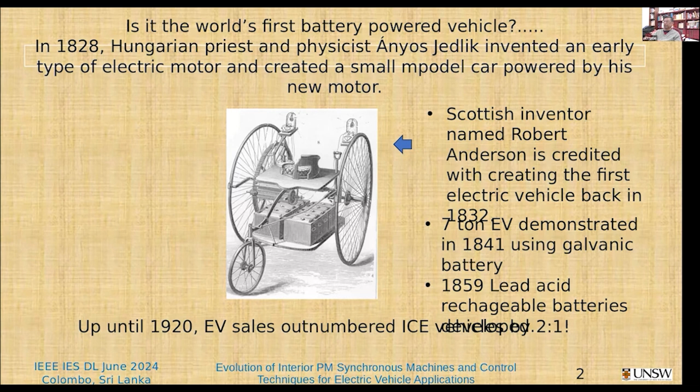The next page, please. Yeah. So, yeah. Because I don't have full control on the screen.

Okay, so what do we need to have a successful and viable electric vehicle? You need an electric motor of high power density, which is item number 1. And the motor must have a very high field weakening range. I'll talk about what is meant by field weakening range a bit later on. And then the motor must have very fast integrated sensors and controllers.

And then the converter has to be very fast and high bandwidth, which is usually obtained with high frequency integrated converters that are now available in the form of IGBT and MOSFET inverters and so on. And then high energy and high power density batteries.

As you may be well aware, the high power density and high energy density batteries are still undergoing much development. I cannot say that it has seen the full development yet, but every day you find in the news that the solid-state batteries are coming, the range is coming up, and so on. So the battery chemistry and other properties of the battery, like energy density, power density, battery range, battery life, total energy storage, and so on, are getting better virtually every day.

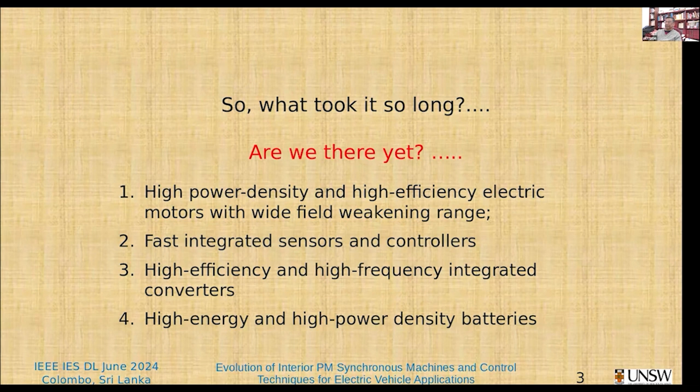Can I go to the next page now?

So can you go to the next page, please?

Now, in order for the world to go to fully electric vehicles, which some companies are saying they will convert all their vehicle manufacturing into electric vehicle making by 2030 or 2035 or 2040 and so on. Most manufacturers are committing to a not too distant future where all vehicles will become electric vehicles, and that will need about 300 terawatt hours of annual battery production, which we are nowhere near, but the way things are going, we should arrive there in the not too distant future.

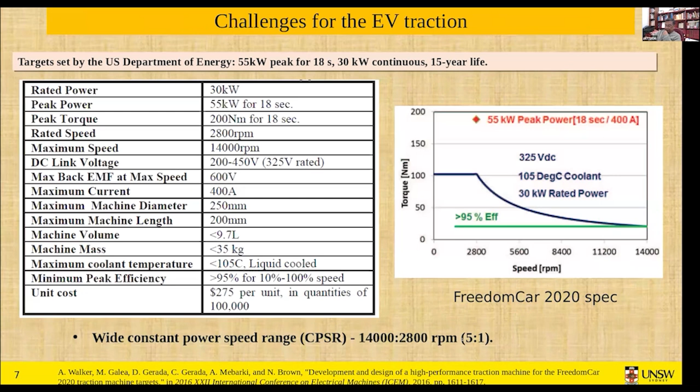Next slide, please. Professor, can you try moving the slides from your side? I have given the control to you. Can you just try it? No, it doesn't move. Doesn't move, right? Right. It works. Okay, so this is the torque versus, oh, sorry, I'm too far ahead. I'm now showing the slide. Sorry, next one. I'm not sure which slide number this is. 8. We can see 8.

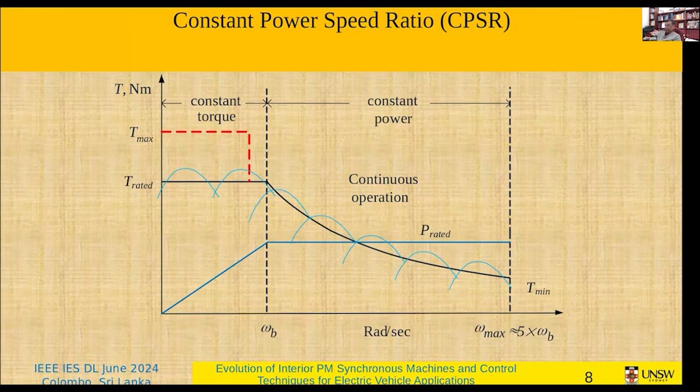I'm now trying to go to the next slide. I have pressed the button for that. Nothing seems to be happening. Yeah, maybe I'll do that. Okay.

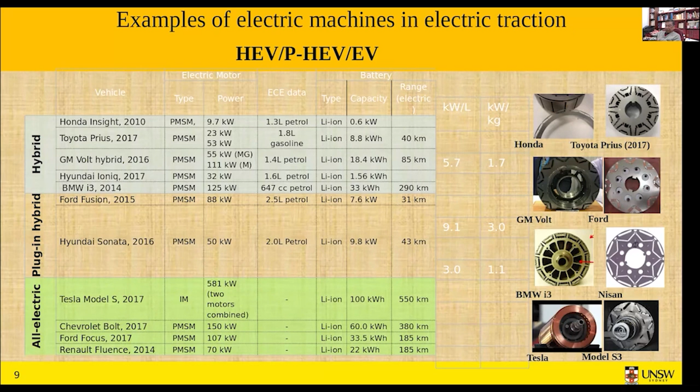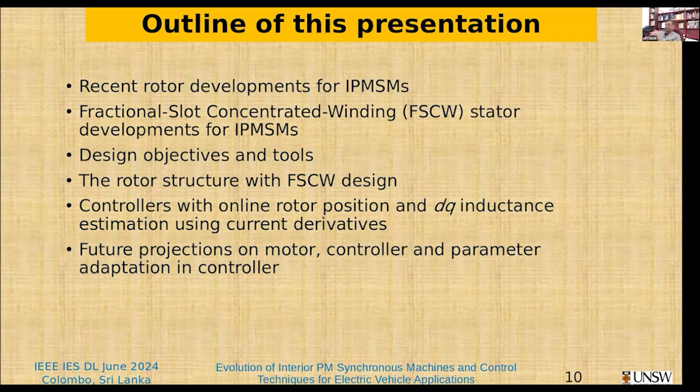So next slide, please. Next one. So this is part one, the recent developments in electric motor.

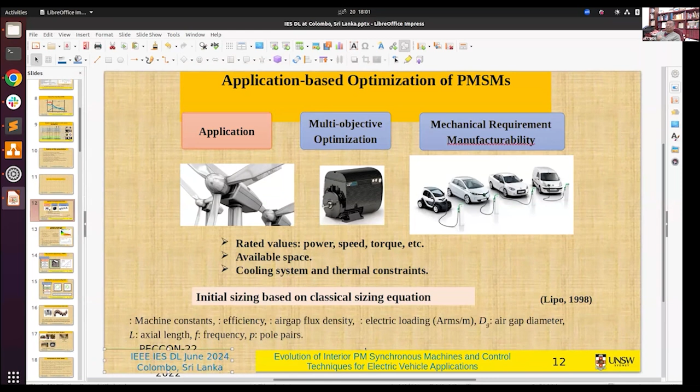I'm not seeing the whole screen. I think something below I'm not being able to see. I don't know why. Can you reduce, no, sorry. That page that you were showing, there was a sizing equation here. Why am I not being able to see that? Oh. There was an equation here. I don't know why.

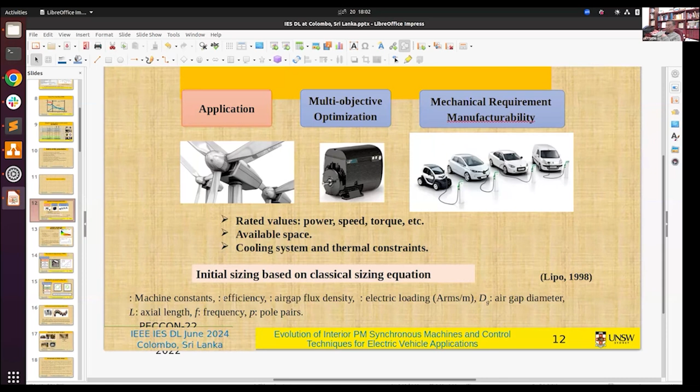Okay, so the machine has to have high efficiency, high air gap flux density, and low diameter, the minimum diameter and minimum length, so that it can be housed within the electric vehicle and so on. So the density of the machine in terms of power to volume ratio has to be very high.

And that equation that I don't see now, why is it missing? I don't know. So that equation showed what parameters we normally have on the mechanical side in terms of dimensioning the machine, and then later what parameters we have in terms of the electromagnetic part of the machine.

So can I go to the next slide now? I think for some reason, the presentation is going outside the screen, at least on my screen. So I don't know why. You can now go to the previous slide, please. Okay, so

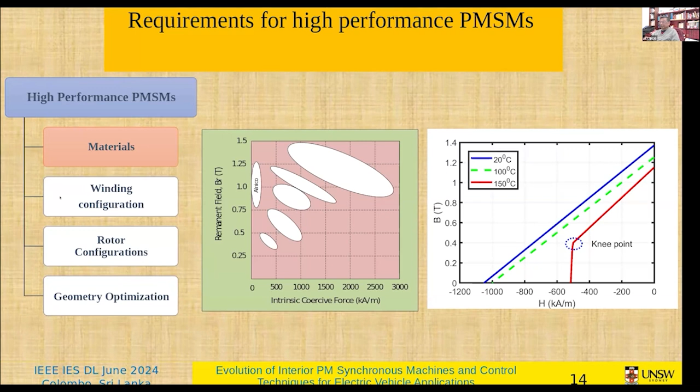Okay, and then let's go to the next slide, please. Oh. Then we look for, sorry, next slide, not so much so far. Yeah, just the next one here.

Up to about 15, 20 years ago, most electrical machines had distributed winding, where the A, B, and C phase windings were distributed all around the stator slots. I think most of you would be familiar if you're an electrical engineer. The distribution of the winding is all around the cylindrical structure of the stator. But recently, we have what we call concentrated winding or fractional slot concentrated winding, which is defined by slots per pole per phase, which is called SPP.

If you divide the number of slots by the number of poles, normally 4-pole machines or 12-pole machines or 18-pole machines, so we know the number of poles in order to determine the base speed. And then we have the phase, usually 3 phase. You can see from the diagram on the right that A, B, and C windings are in localized slots. A winding is in the left and right slots, B winding is on the top and bottom slots, and so on. So the slots don't overlap, which are called concentrated windings.

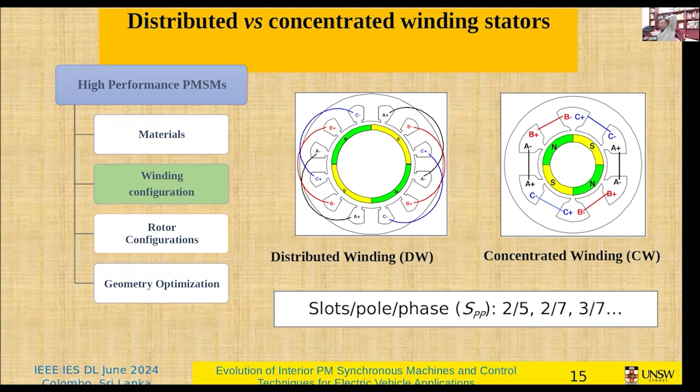Now, these are the slots, and the windings are concentrated, as you can see in this diagram. The slots and the windings can be modular. That means each pole can come with its winding. This is not how the distributed windings are made. This is called fractional slot concentrated winding design. In this design, the stator poles and the windings can be wound separately and then stacked together.

Now, this has several advantages. One is that we can do modular design. The pole and the winding can be manufactured separately, and then they can be put together as shown on the right-hand side. This kind of concentrated winding also gives you high inductance in the stator windings, which means that the inverter, the motor drive, has a high fault current rating, or the fault current can be tolerated better because of the high inductance. The inductance will slow down the rise of current

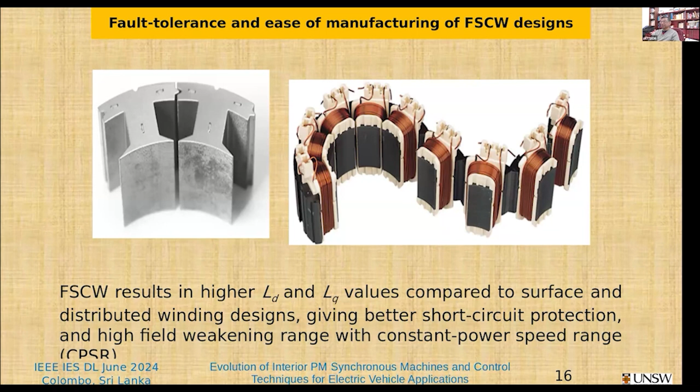Now, as you can see here, the example at the top left hand has several motors, IPM machine with concentrated winding. As you can see, the windings are put together on individual poles, and then they are assembled together. All right. So, in other words, the stator parts come in parts, in many parts, and they're simply put together.

Now, in one of those slides at the bottom, which is the right-hand side, we have the magnet. You can see here the magnets are in the rotor, and the stator is on the left-hand side of the Toyota Prius, which is 2010 and 2017 design. So you can see that the magnets look like a V. I'll talk about that a bit more later on.

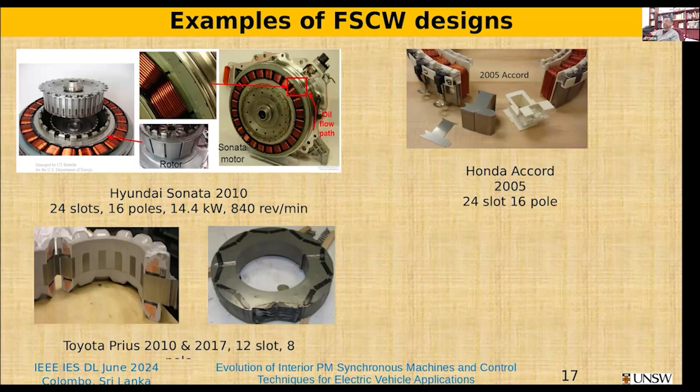So this is the way IPM machines are being designed. The magnets in the rotor, and the magnets have certain shape, in this case V shape. And if you look closely, you will also see that there is a bit of iron between the two parts of the V, and that iron has to be very carefully dimensioned so that the machine has the proper field weakening capability. So next slide, please.

Now, I have already mentioned some of this before. The FSCW design, the fractional slot design, can give you high field weakening range. Cogging torque can be made very small by using a very large LCM, the least common multiple between the number of poles and the number of slots. It's all in that number called SPP, which is slots per pole per phase.

Now, the concentrated winding doesn't have the end winding. In distributed windings, the winding at the back of the cylindrical body has to travel rotationally, has to travel in an angular direction before entering the next slot. So that is an overhanging part of the winding, which serves no purpose. In terms of torque production, that means the copper length is reduced, the length of the winding is reduced, and as a result, copper losses are also reduced in this machine so that the efficiency can be higher.

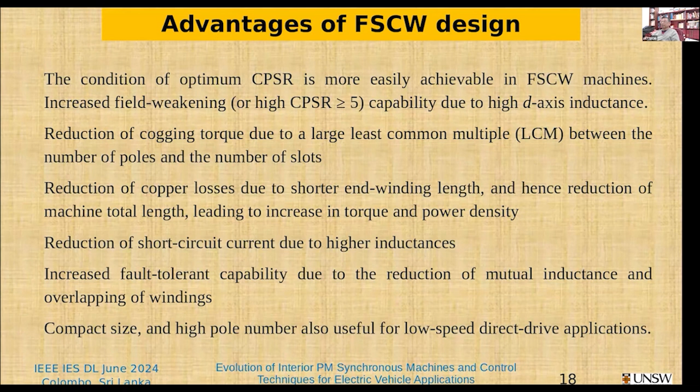And because of absence of the overhanging winding of the distributed winding, the motor becomes of compact size, and that also gives you high power density, which is required for electric vehicle because the space under the vehicle is very limited and therefore expensive, and has to be used with a lot of efficiency. So next slide, please.

Now, after the stator design comes the rotor design. I have mentioned V-shaped winding, spoke-shaped winding, and then multi-layer winding. There are several multi-layer types, can be V-shaped, and then combination of V and spoke, and so on. There are many geometries possible, all right? But in the last few years, all these geometries have been studied extensively using finite element method of analysis, and then various designs of the rotor poles have been optimized.

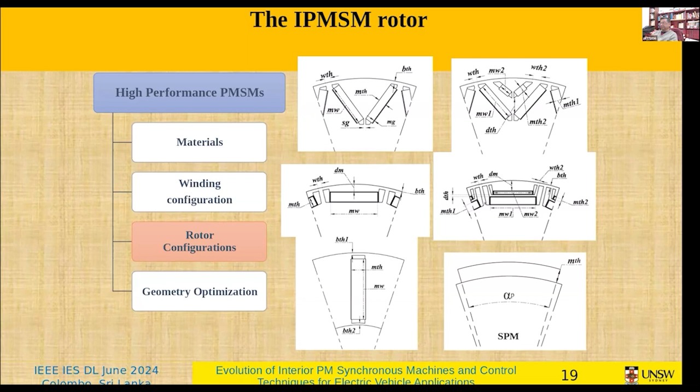Now, the geometry optimization. The geometry that you had seen in the previous slide, both in terms of the stator and the rotor, the placement of the magnets, the thickness of the magnets, the bridge between the two sets of magnets, which is the middle part of the two sets of magnets. So various dimensions are there: length and separation at the outer part, at the top of the magnet, separation at the bottom of the magnet, separation between the magnets, the iron bridge dimensions, and similarly for the stator, teeth and slot and so on. There are so many dimensions. So we need to have the geometry optimized, which is the last part, okay?

And in the geometry optimization, we first decide what attributes of the machine we want to have, all right? What inductance we require, which will give us sufficient fault tolerance. What should be the efficiency of the machine? What should be the low torque ripple? What should be the power factor? What should be the torque density or power density, and so on? And what should be the field weakening range, whether we are meeting the 5 times or 4 times or 6 times the power range from base speed to full speed. So all kinds of attributes or optimization goals we can define, all right?

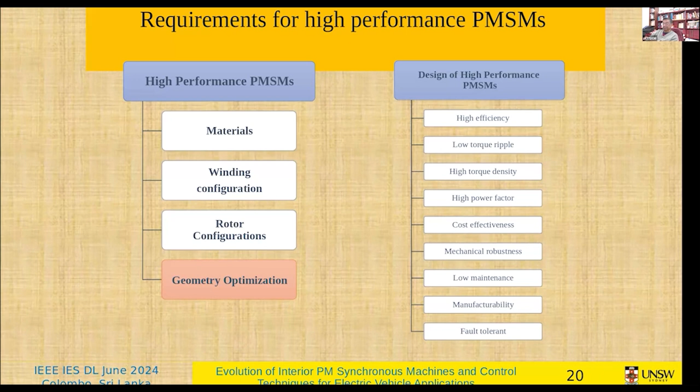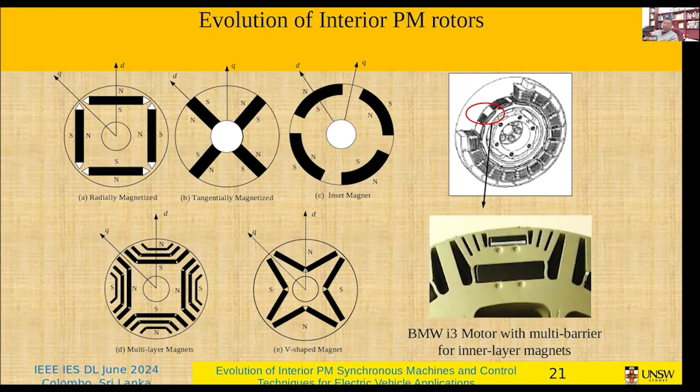Can I go to the next slide, please? So these are some typical machine designs. As I said, the V-shaped and the multi-layered designs, which are items D and E, are the two most favored. The multi-layered design is favored in Europe, and the rest of the world is using V-shaped magnets. Next slide, please.

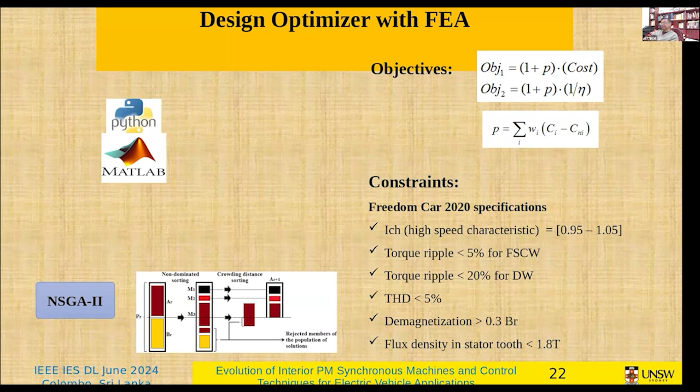Now, the optimization process, for example, the Freedom Car 2020 specification defines these specifications, all right, that a motor must meet. And then we used MATLAB, then finite element analysis and optimization procedures for every dimension change to see if these characteristics can be met. So these were goals set for Freedom Car in the USA, Freedom Car 2020. All right. But one motor that we designed, came up with in 2018 and 19, meets these characteristics, except for the power density. All right, we are slightly below the power density. And I'll show you that design further.

So can I go to the next stage? Next page. Next page, please. This one? Yeah. So,

This is the thermal design. Depending on the magnet and the iron dimensions, we can create a thermal model, all right, in terms of thermal resistance, thermal capacitance, and so on. So that is an RL network or RC network, which we can establish for the thermal model of the machine. And then we solve the thermal model to see what will be the power loss. All right. And then we determine from the thermal mass what will be the temperature range or rise. And if the temperature rise will go outside the magnet temperature limit. All right. Normally the magnet temperature is to be kept within 100 degrees C. So not only do we need the other electromagnetic performance, we also have to have a thermal performance.

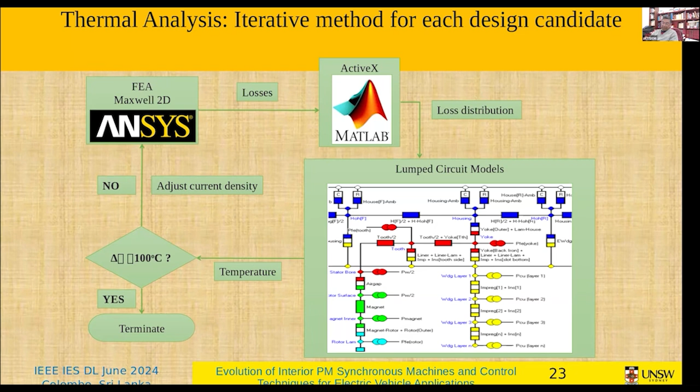So these are one design reported in this paper, which is called delta-shaped magnets, all right, which is a rotor which was optimized, and their goals was to extend the field weakening range or constant power range, minimize losses, reduce torque pulsations, reduce harmonics in back EMF so that the torque ripple is contained, and so on.

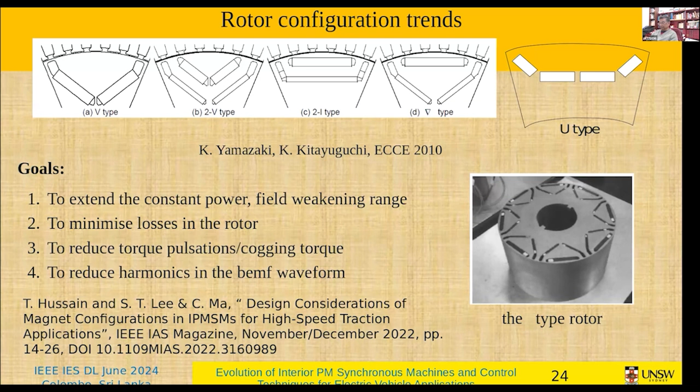So the delta-shaped magnets look very promising in 2010. However, I have not seen any use of it in any industrially produced electric vehicle yet. All right. I'm just bringing up this design to show that there are so many varieties of electromagnetic design that have been used or tried with a view to improve and meet the performance requirement of electric vehicles. Next slide, please.

Now, this is the Toyota hybrid vehicle. This is the Toyota vehicle Prius motor characteristics, which is used for hybrid vehicles. All right, it doesn't have the full 5-to-1 speed field weakening range because it is only used for duty to accelerate from 0 to full speed. All right, not for field weakening.

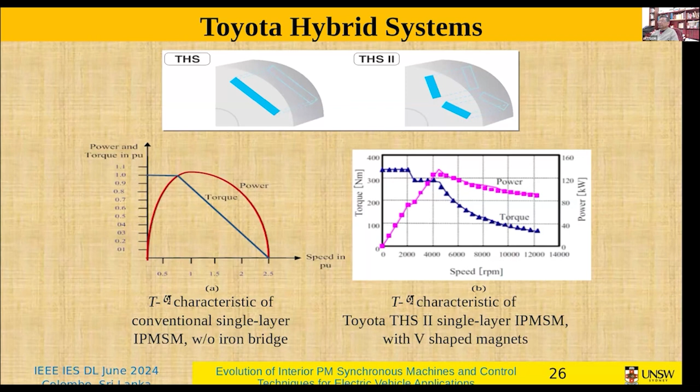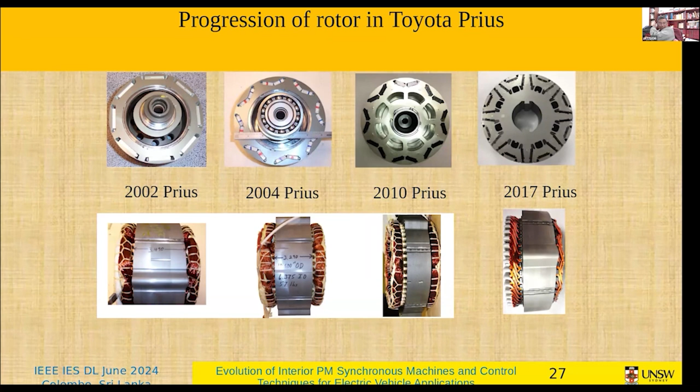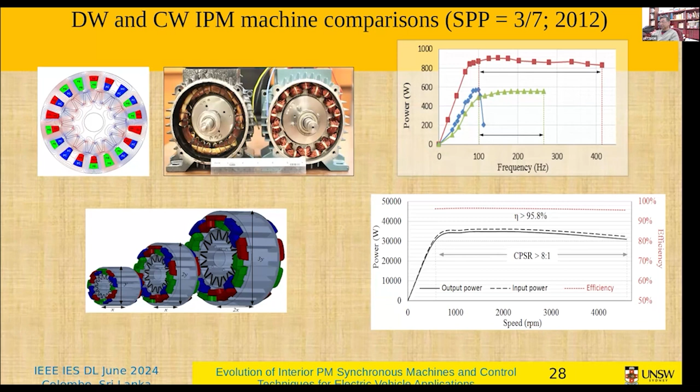an 18 slot, 14 pole machine, there were low order harmonics of torque which needed the D and Q axis shift when the machine was operated at high speed. That is not attractive at all for control purposes. That makes the control very complicated. Anyway, later on, after we understood the role of the V-shaped magnets, we then embarked on other designs. I'll show, if you go to the next slide, please.

Okay. So this Y-shaped motor allowed us to meet the FreedomCAR 2020 specification in 2018, except for the power density. And we believe that the power density could not be met because our machine was a small size machine, only 2 kilowatt. If we made it to higher capacity, then its power density would have been higher. So anyway, if you go to the next slide, please.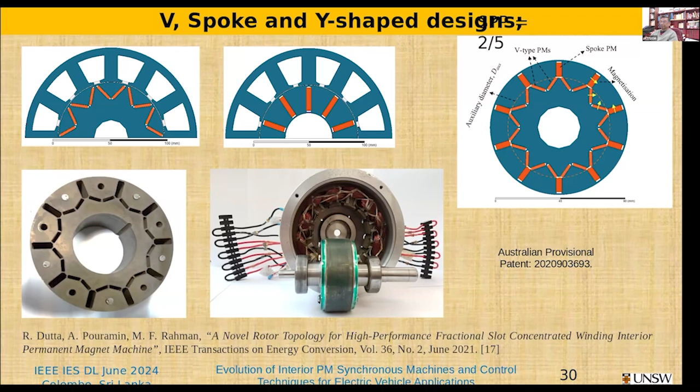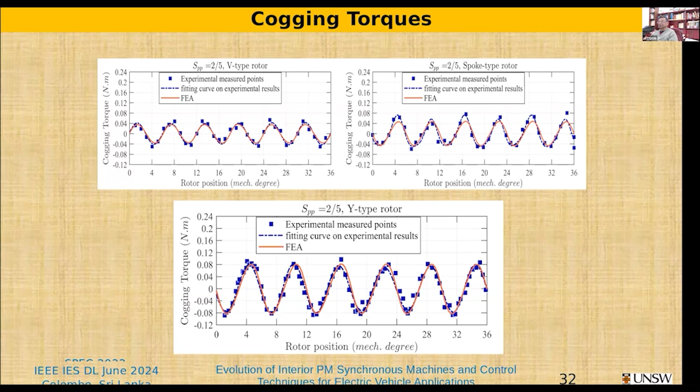These are torque ripples. Again, the Y-type rotor, while it is running, because of its high back EMF, and the slightly higher ripple, gives you about the same, slightly higher ripple torque. That means the torque produced varies at different angles. The motor produces different torque at different positions. Ideally, it should be very smooth, but that never happens in any electrical motor. And these torque pulsations are quite low compared to what many existing motors have.

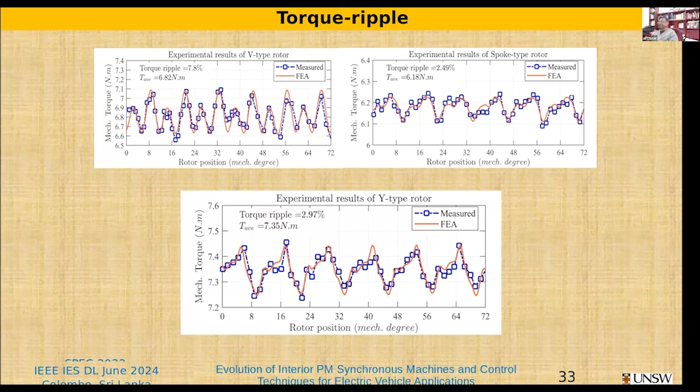Okay, so you can see that the V-shaped magnet has 7.8% cogging torque, whereas the Y-shaped motor has 2.97% ripple torque. Sorry, not cogging torque, but ripple torque. Next slide, please.

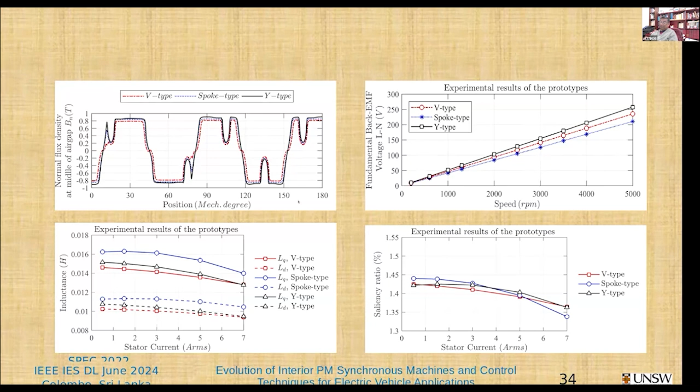These are inductances of the machine and the flux density distribution in the air gap and so on, which have been shown in another form in the previous slide. And we also see that the back EMF goes up linearly with speed, which is obvious, but the Y-shaped motor gives us higher back EMF compared to spoke type or V-shaped magnet motor, which is the reason for its higher torque production or torque density and lower ripple in terms of percentage. Okay, next slide, please.

So this is the top one. Again, the Y-shaped magnet shows higher torque speed range, all right, with the required 5-to-1 field weakening range and higher torque overall speed and so on. Okay, so compared with the two other types of motor, the Y-shaped motor has given the best characteristics, and we have produced the efficiency map of the motor. That means what will be the efficiency of the machine at different operating speeds and different operating torque. All right, so that is shown for the three different motors

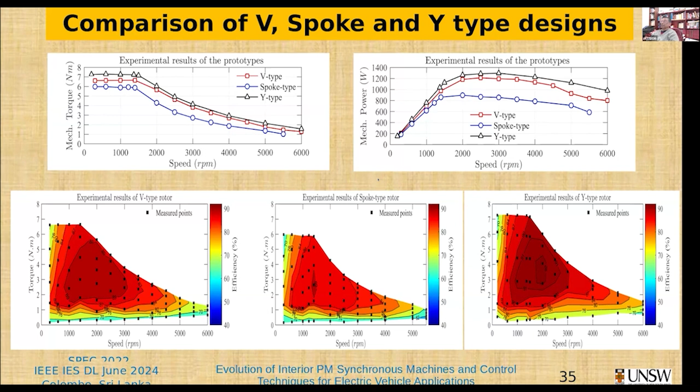in the three curves. And as you can see, if you overlap these three curves, it will become a very complex figure, but you can then determine that the Y-shaped motor gives you better efficiency, higher torque, and so on compared to the other two. So we have this Y-type motor currently patented in Australia and USA. And we are hoping that it will be taken up by some vehicle manufacturer sometime in the future. So next slide, please.

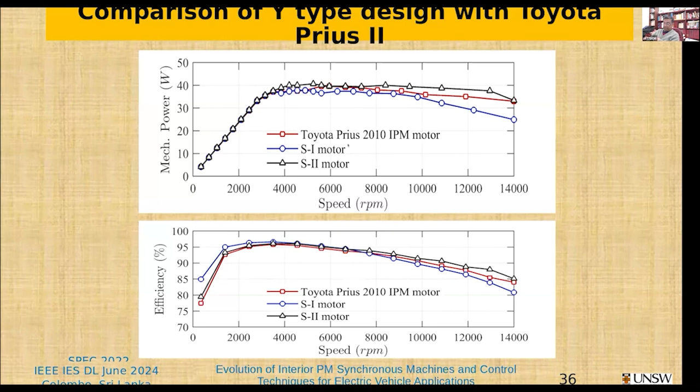This is a comparison between the Toyota motor and our Y-shape for similar power range, or for similar dimensions of the Toyota Prius, okay? And we can see that our motor is a little bit better than the Toyota motor. Now, let's go to the next slide, please.

So this is the summary of the IPM motor development. The designs are targeted to meet specific specifications. The designs can now be thoroughly checked by using multi-objective optimization process, advanced optimization techniques that I have just mentioned in this presentation can lead to novel designs. Our Y-shape motor is, we consider, such a novel design. All right. So because various companies are coming up with various types of design, off-the-shelf IPM machines, like you buy an induction motor for an application from the shelf, are still not available.

Off-the-shelf machine will probably take still a few years to settle down. That means everybody will agree that a certain design is the best and everybody will use that design, and there will be no other requirement to check any other design. Okay, so that stage hasn't arrived yet. It will probably arrive in a few years' time. So that's the summary of the motor development.

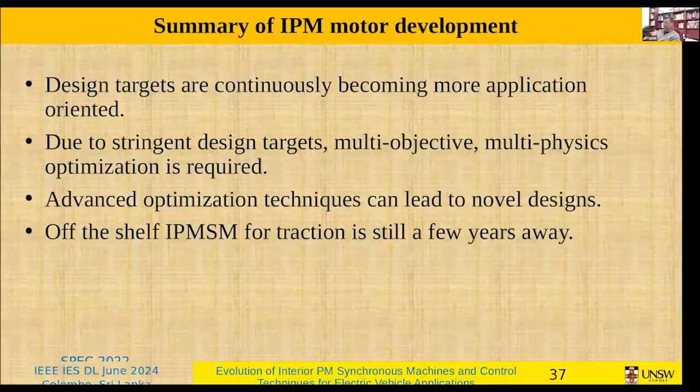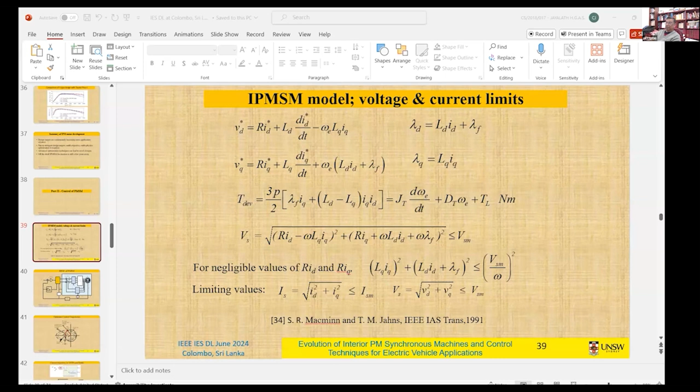So there will be no problem with equation presentation. I didn't realize that the PowerPoint presentation at your end may also require the equation. Yeah. How about this one, right? Professor, can you see it clearly now? It's much better, I guess. Yeah.

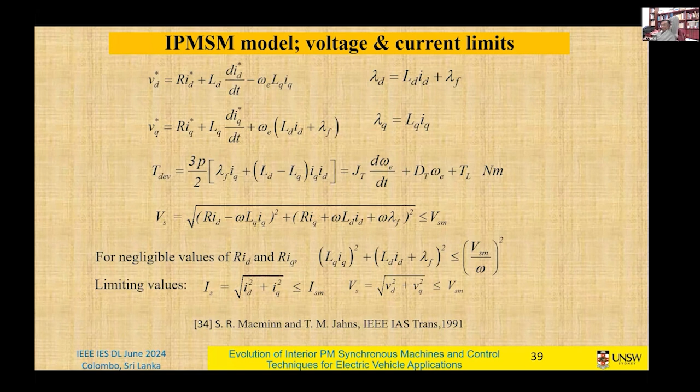Next slide. Next slide. Next one.

So when the machine is running at speed below base speed, our current will always be less than ISM. That means we are operating within the circle. Back EMF is below base speed. So our current reference ID can be simply calculated from this equation.

Now, this equation is simply the equation which is derived from there. Now, ID is given by this. And IQ is given by this expression, but this expression is found from a condition that torque will be maximum. So under base speed, the condition for maximum torque is like this. This is after a bit of mathematical analysis, which I have not included for the sake of time.

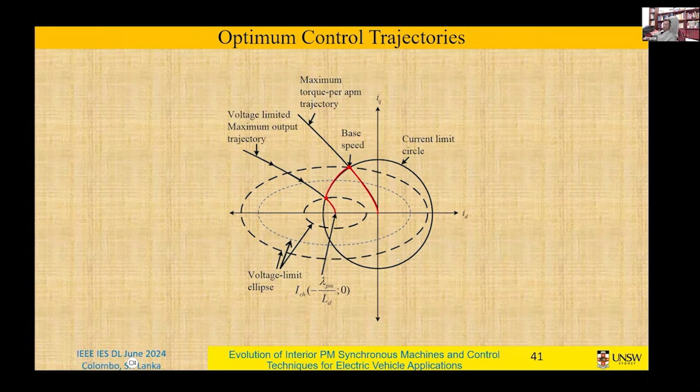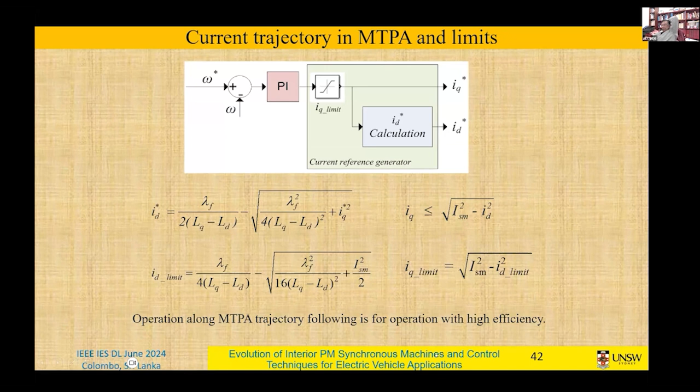If you go back to the block diagram, there is one block diagram here, which has the IQ current limit and ID current limit. So the limit is indicated in the block diagram. Those limits are calculated according to this equation and placed there. So this is a variable limit. One has to put that in the control system to execute the current limit. Okay, so let's go back to where we were. The next slide.

So once the current reference values are obtained, they will be subject to limits as we have shown before. And then there is the current controller, the Q-axis current controller and the D-axis current controller. And then there is some voltage compensation. From the voltage equation, you should compensate the voltage according to what these two equations are saying. After the current controller, GCQ and GCD, we have a voltage reference to go to the inverter, to produce the voltage across the machine. But we should add to that voltage reference the additional voltage according to speed and currents as indicated by these two intermediate blocks. So that will enhance the voltage reference to produce the required current.

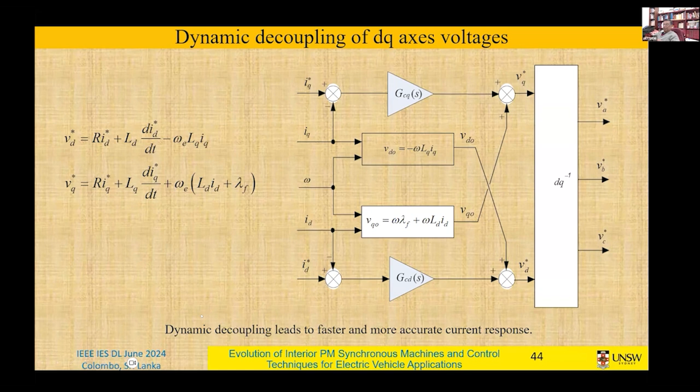In other words, the current response would be more accurate and would reach the reference value more quickly. So the control would be faster, more precise, and the torque response would be faster as well. Okay, so this is the way the motor is controlled. Next slide, please.

And then there is also some hierarchy in the control. Below base speed, that means when the sum of the D-axis and Q-axis voltage, VD and VQ, is less than the rated voltage of the machine, or the maximum voltage of the machine, then the stator IQ should determine the VQ first, and then the remaining voltage should be VD.

On the other hand, if the voltage has hit the limit, that means the back EMF has already been reached, then the ID current control should have the priority. So the VD would be selected first, and then VQ would be selected, whatever is the leftover, which is in the block. I should have mentioned the block number, which is the right-hand side block, the second block from the top. So if the machine is running above base speed, VD becomes selected first. The remaining available voltage is VQ.

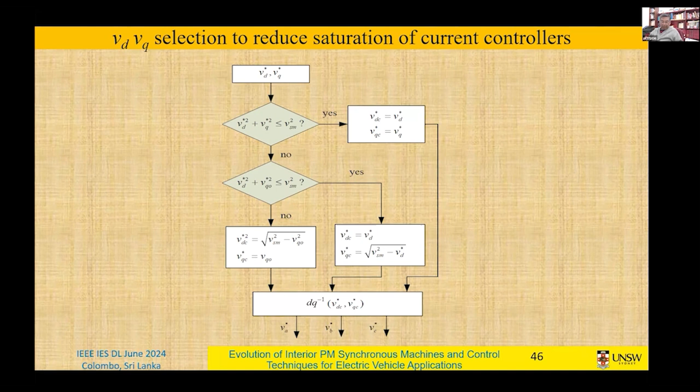On the other hand, if the rated back EMF has not been reached yet, the machine is operated at low speed, then VQ should be selected and VD should be selected. In fact, there is no hierarchy then because the voltage is not hitting the limit. So anyway, these are the hierarchies of control of VD and VQ depending on the speed at which the motor is running and whether the voltage limits have been hit. All right, next slide, please.

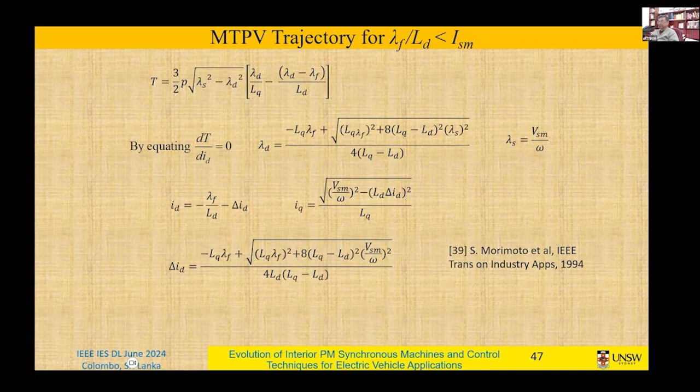So this is what I was talking about, the MTPV, where the quantity under the bracket previously did not become a positive quantity, so its roots could not be found. Anyway, the analysis is given here, how to calculate the ID along that small trajectory that I indicated before, and how the IQ trajectory is found. More detail can be found in this paper that I have mentioned here. Now, can I go to the next slide?

Yes, so this is the operation of the machine in simulation and experimentation. The acceleration along the MTPA, then field weakening under maximum current, and then operation along the elliptical line to the final speed. Sorry, go to the previous page, please. So we can get operation over a wide speed range: constant torque, and then field weakening. This is the field weakening part, and this is constant torque operation.

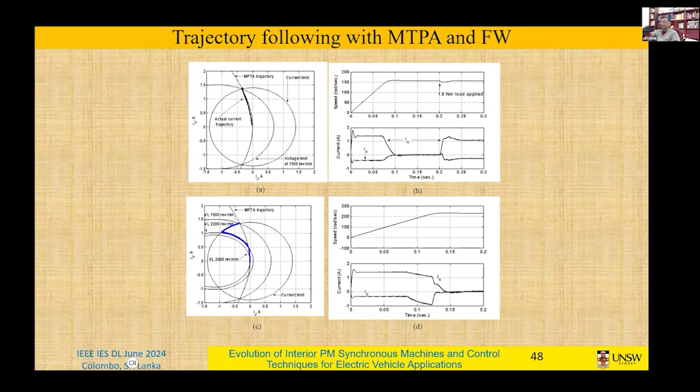So all these trajectories have to be calculated online, or they can be stored in lookup tables, and the control system just finds the value from lookup tables or computes them, and then voltage compensation, and then the hierarchical selection of VD and VQ reference, and that's it. That gives you very high performance control. Now, why high performance control? Go to the next slide now, please.

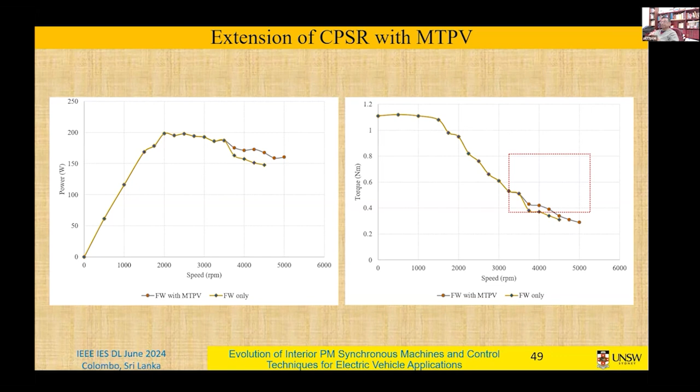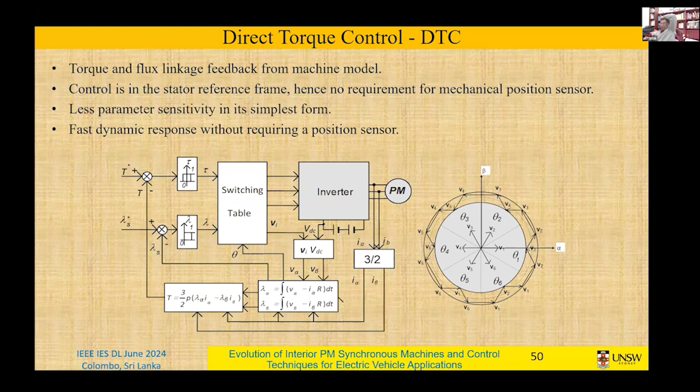Now, this is another method of control called direct torque control, where the machine is operated with the torque and flux reference. I'm including direct torque control in this presentation only to show that there is an alternative way of control, but most electric vehicles use the method I have already explained, with the help of the rotor position sensor and control in the DQ reference frame. Vehicle manufacturers prefer that because the sensor on the rotor gives them confidence that the vehicle is always under control, even at very low speed.

Direct torque control is another way of controlling a PM synchronous machine, in which the torque and flux are computed, and then those are used in feedback loops. After all, in any control system of a motor, we are controlling torque and flux. So if we can close the loop on torque and flux, why use current loops? That is the question. But in order to calculate torque and flux, you need currents anyway. So current sensors will be there, but in order to calculate or estimate torque and flux, you don't need position, because, as you can see here, flux is computed by voltage and current.

All right, and torque is computed by currents and fluxes. This lambda alpha, lambda beta, these are not determined by position at all. So if we can calculate torque and flux, then that's all we need. We don't need position. So direct torque control is a control method that doesn't require a position sensor. And that's one component out of the system, and in some cases, it could make the drive cheaper. But we can calculate torque and flux and control the motor.

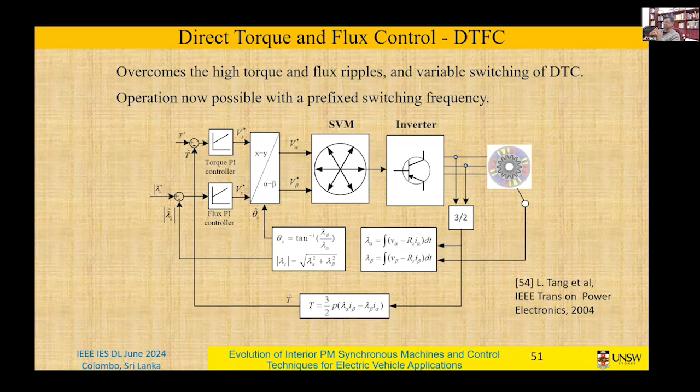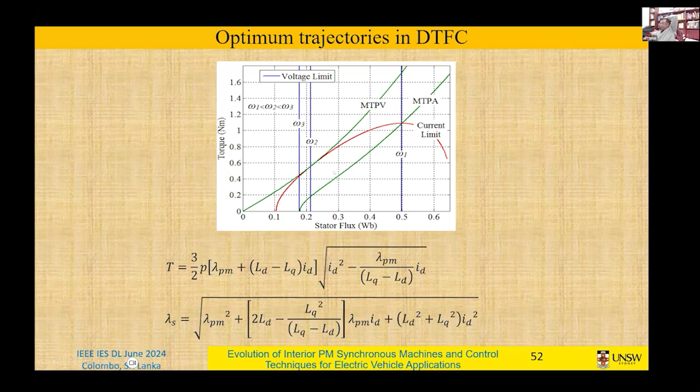All right, so let's go to some results right here. You can see that the machine was accelerated with constant torque and then reached the limit of MTPA. That means the base speed here. And thereafter, the machine is operated under flux weakening, which is the parabolic line. And then at maximum speed, the machine follows the vertical line and then settles at a final speed. And the operation is along the vertical line then. So this is how the machine is operated.

Accelerated and operated with maximum torque to base speed, and thereafter maximum torque production, following the trajectory under current limit, but producing the highest acceleration under current limit. Under torque and flux reference, according to what we have seen on the previous page, operation along this line gives operation along the current limit and maximum torque for that speed. So this is how DTFC operates. It's very robust and very simple to do compared to the RFOC, which needs quite a bit of closed loop control and fine tuning of the controller and limit setting. Okay, next slide, please.

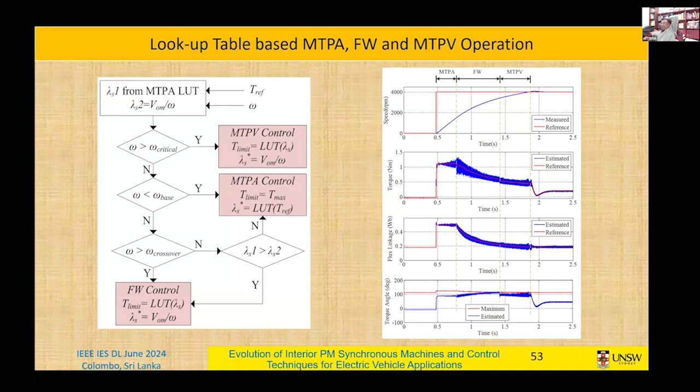I think for this, because we are now, on my watch, it is about 12:15. So these are various ways of calculating the torque and flux.

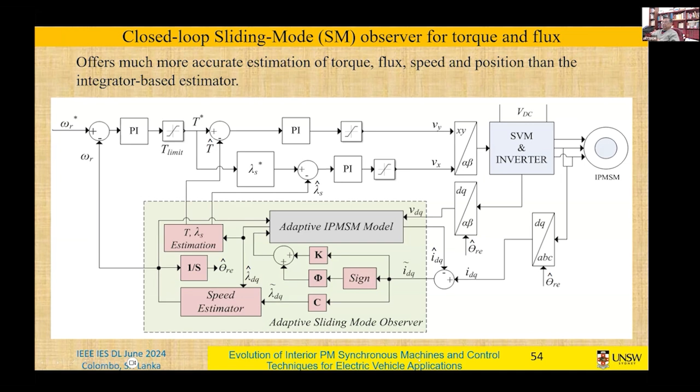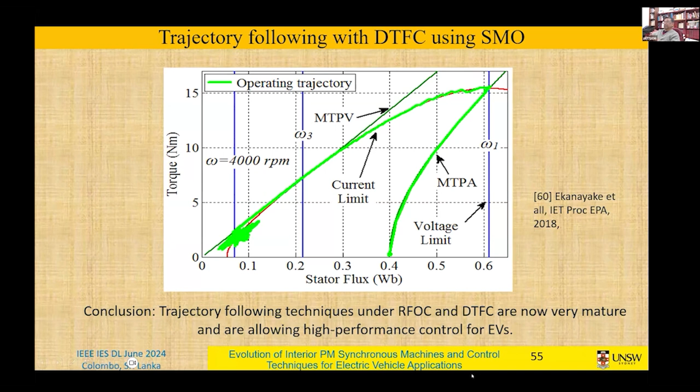So this part is about parameter dependence of RFOC and DTFC. In the previous slides, in all our mathematical models, we have calculated ID limits, IQ limits, or torque reference and flux reference, but all of those formulas had machine parameters like resistance, inductance, flux linkage, and so on. But those parameters in a real machine change with temperature and change with current. So we should adjust those parameters in real time.

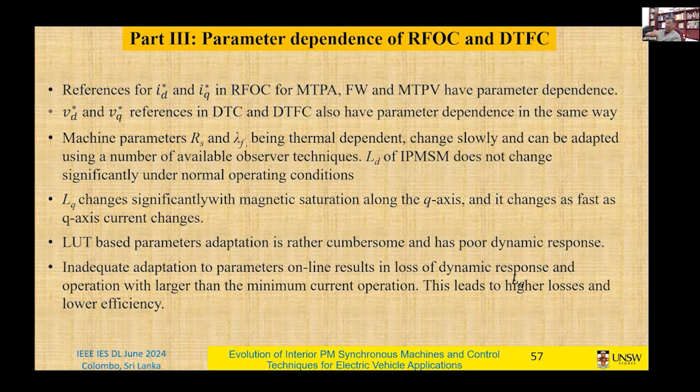Now, LQ changes significantly for IPMSM. LD does not change significantly. But LQ can change by up to 30%. So it can change the torque estimation or current estimations or the current limit calculations quite significantly.

Next slide, please. Excuse me, sir. Yeah, so due to the time constraints, can we skip part 3, sir? Okay, yeah, I can skip this part.

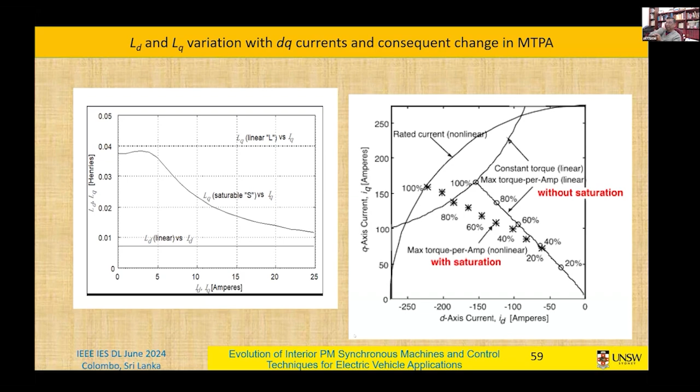These are quite advanced, and these techniques have not yet gone into electric vehicles. These are very recent techniques, not part of any electric vehicle yet. All right. So I can skip this part. Thank you for that. If you are interested, you can read the last few pages in my presentation material. Thank you for listening.

Yeah, so even in the upcoming workshop series, since it's an advanced thing, we can have that part in the lecture series for the participants. Yes, we would like to have that also in the future. Thank you, sir. Okay. All right. So are there any other questions from the audience?

Professor, thank you so much for taking a lot of time, even though you have passed your midnight. Unfortunately, we had a few technical issues coming here and there, but that always happens. That's all fine, I guess. But it was a wonderful session. Thank you very much. So I'll let all the formalities be done by the other young professionals.

But I have a very generic question for you, not a very highly theoretical question, from the things that you have explained. Now you have explained a lot about electric vehicle technology. According to my knowledge, before electric vehicles were popularized, we knew that for a long time locomotive engines have been using electric power to run. I have seen two ways. One is like, even in Sri Lanka, we don't have direct electric locomotive engines for the train.